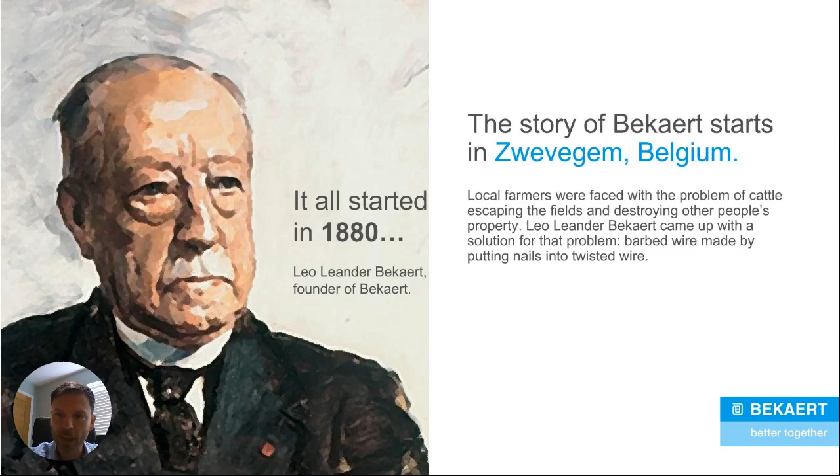Steel wire. We transform it, apply cutting-edge coating technologies, and specialize in continuously improving any property of steel wire products. Explore the world of Bekaert. From wire rod, we draw steel wires even as thin as 1 micron. We bundle them into cords or strands or ropes and can process them into an end product. We design and coat them to meet your specific requirements.

From specialty steel wires and cords for automotive component and tire makers, over solutions for agriculture or the construction industry, to leading technologies for the energy and extraction sectors, the numerous applications of Bekaert products are as unlimited as your imagination. We co-create with you. It's the core of our corporate philosophy, better together.

Whatever your need, wherever you are, Bekaert is present all over the globe. We're committed to assist you with our local support and services whenever you need them. We aim to be your preferred supplier by delivering superior value in everything we do. Before any Bekaert product reaches you, its quality is assured thanks to extensive testing. And that's how we've created a legacy that stretches over 130 years. Every day, we continue to build on this experience and increase our expertise in our world of wire.

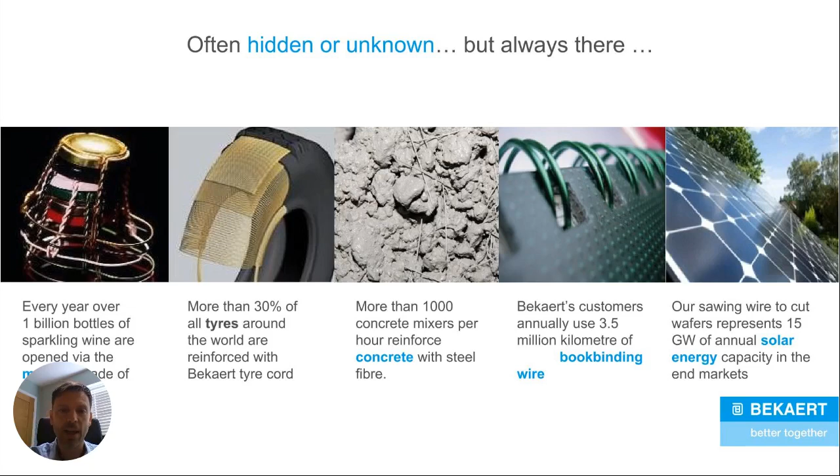It's not just building products that we make. If you can see these slides, champagne cork wire, for example, is a niche market of 5,000 tons per year. That's a lot of fizzy wine. Our largest industry is automotive, and the biggest product that we make there is reinforcing cord for rubber tires. We actually have a 25 to 30% market share of that worldwide, so we like to say that we've reinforced a tire on average on every single car in the world. Then there's Dramix steel fibers, but also other things like solar panels and even simple wires for book binding, that sort of thing.

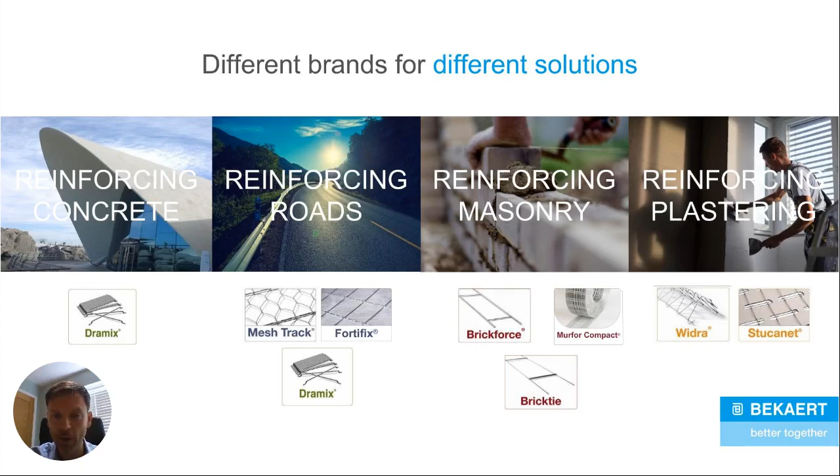These are our building products. On the left-hand side, you can see Dramix steel fibers. That's what today's talk is about. The other products that we have, other than reinforcing concrete, can reinforce asphalt roads, masonry, and plastering. If anybody is interested in seeing a webinar about those products, please let us know separately and we'll arrange that accordingly.

Some of the applications that we have for reinforcing concrete are as follows. Industrial floors is our day-to-day product. Tunnels and mining are usually our largest projects that we have.

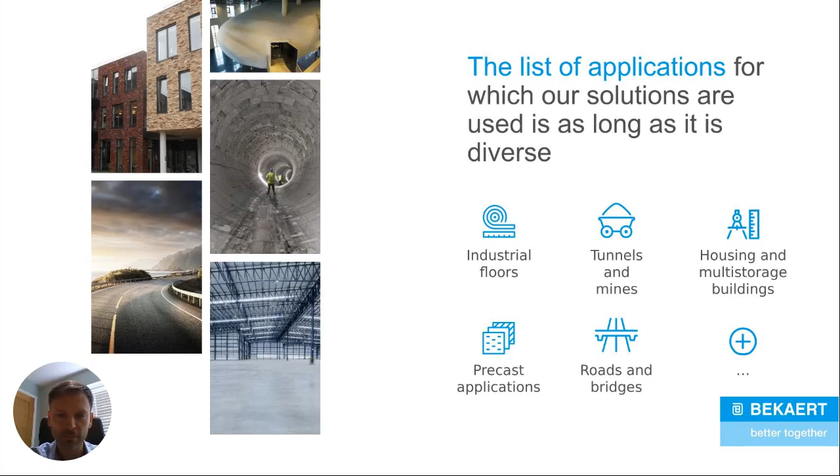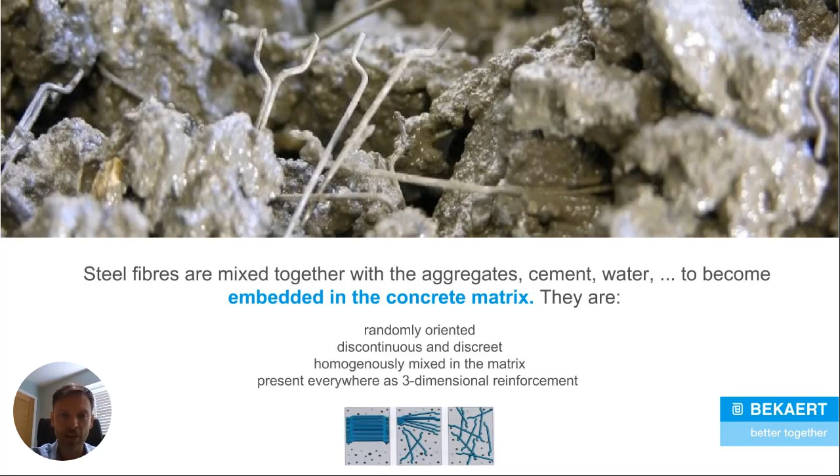The whole principle of steel fibre concrete is completely different to traditional reinforcement. Steel fibres are added to concrete to provide a ready reinforced concrete material, and the idea is that it is 3-dimensional. So there is no concrete cover. The fibres are mixed throughout the whole concrete mix, providing a matrix of steel wire, giving 3-dimensional reinforcement.

The idea of having 3-dimensional reinforcement is that when concrete exhibits an initial yield, there will be fibres inside that concrete mix, and the idea is that they will bridge a crack and transfer stresses from one side to the other. Depending on the fibre type or dosage, you usually count around 100,000 fibres per cubic metre, and sometimes more. The idea is that there will be such a network of reinforcement that when there is this initial yield, there will be reinforcement in the locality to do so.

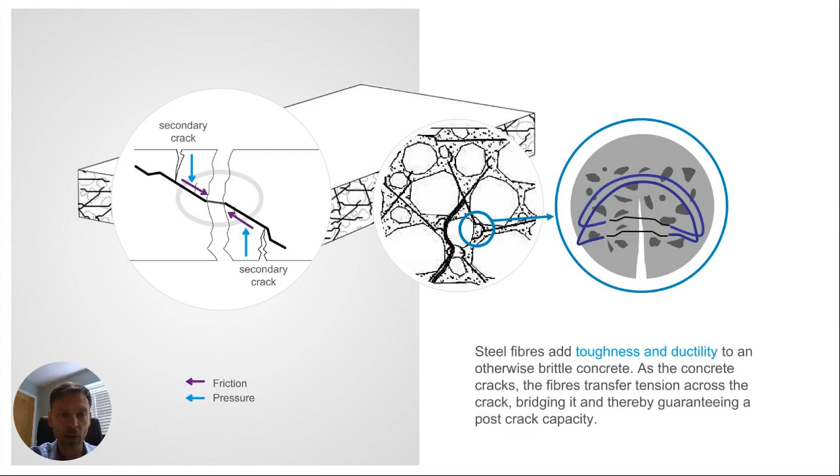Lots of different things are affected in concrete by the addition of steel fibres. The most important one really is increased toughness. This can also be called ductility or post-crack strength, and we'll be covering that in depth today. But also things like shear resistance, impact and fatigue resistance are all increased as well.

There are a number of different factors that affect how high or low performing a steel fibre is, and these are going to be covered in the next few slides.

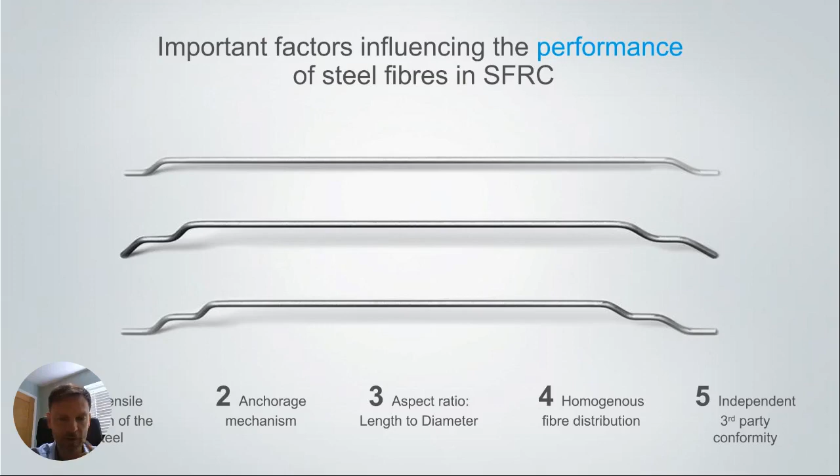The first one is the tensile strength of the wire. Most of our steel fibres use a tensile grade of wire of anything from 1100 to 2300 newtons per square millimetre, so at least twice that of traditional mesh. If these steel fibres with this shape were made from 500 newton grade wire, just like mesh or rebar, then they would fail in the concrete.

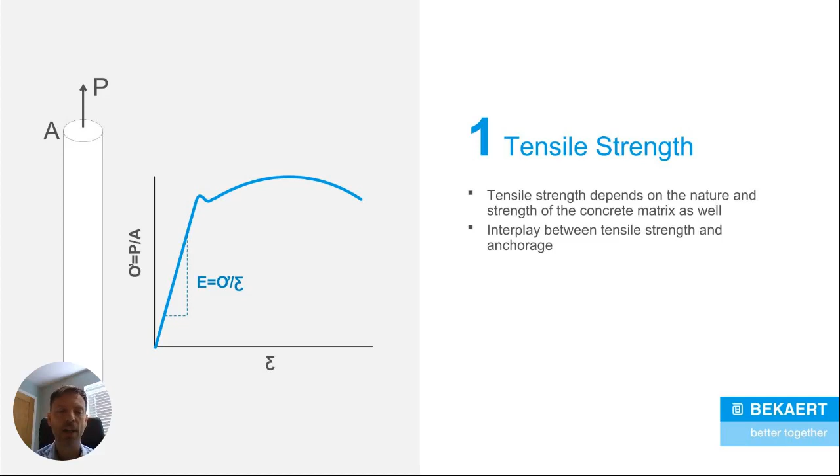The second important factor is the anchorage mechanism. This is effectively the shape of the fibre. If you could see these three fibres on the screen, Dramix 3D, 4D and 5D, they all have different shapes. The idea is that these shapes are called anchors and they lock into the concrete to provide concrete ductility.

This slide shows the 3 different fibre families that we have: Dramix 3D, 4D and 5D. A little bit of history - Dramix 3D is the original Dramix. We've been making that in Belgium and overseas since 1975. Until 2012, Dramix 3D was called simply Dramix because there was no other type. It is a straight wire fibre with hooked ends, a simple hook end.

What we can see here is the effect of having a single fibre embedded in concrete, 50%, and then pulled out of the concrete. With an individual 3D fibre it would take a force of around 300 newtons for that fibre to yield. The failure mode of that shaped fibre is that if you apply enough force, the fibre will pop out of the concrete. The anchor would deform, the fibre would become completely straight, then pop out of the concrete and stop providing ductility to your concrete.

Dramix 4D was developed after a 3-year research and development program between 2009 and 2012. You can see the failure mode is actually very similar to that of the 3D fibre, but you need a much higher force to start that elongation of the anchor - 500 newtons to see the fibre start to pull out of the concrete. So the 4D fibre has the same failure mechanism, but it takes a greater force for it to actually happen.

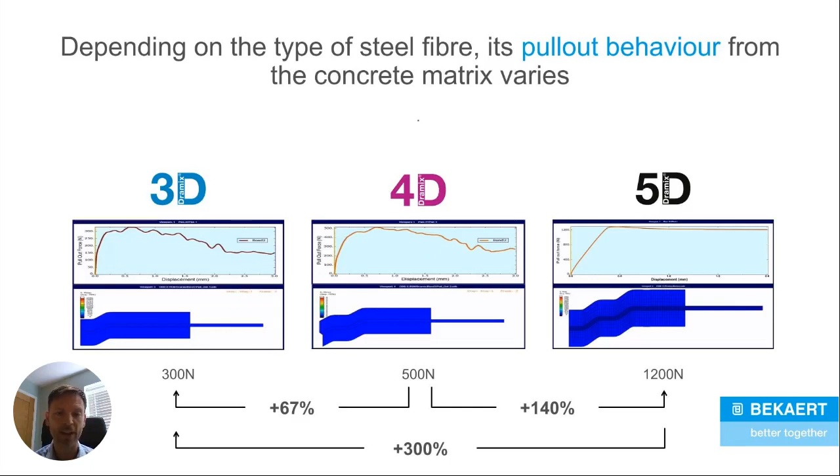What happens to the straight part of the wire is the yield will occur there, but in order to stop that fibre from snapping, we use an ultra high tensile grade of wire of 2,300 newtons. That wire has an elongation capacity, a certain percentage allowance to allow that fibre to stretch without breaking. So the failure mode of Dramix 5D is completely different, and that gives us different ductility values because of that.

The third thing is the aspect ratio. This is the length divided by the diameter of the fibre, which gives you a number. The higher that number, the more fibres you have in your concrete mix, so the denser the wire matrix inside your concrete.

For example, on the right-hand side we have 3 different Dramix fibres. They're all from the 3D family, so they all have a single hook on the end, but they have different aspect ratios and different lengths. One is 50, the other two are 60 millimeters, but drawn to different diameters. If we look at the 3D 4550 BL, that's a 50 millimeter long steel fibre with a diameter of 1.05, giving it an aspect ratio, rounded down, of 45.

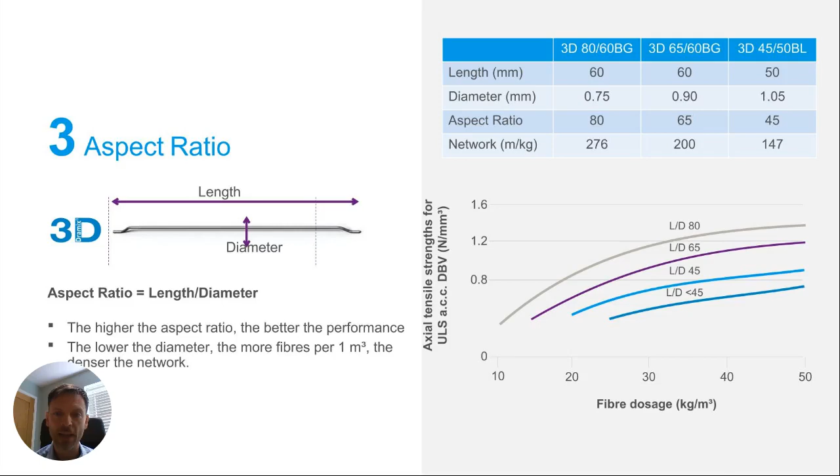If we have a 60 mil long fibre, drawn down to a 0.75 mil diameter, you actually get a lot more fibres per kilo, meaning a much denser network of steel inside your concrete. You can see the actual network of wire in a cubic meter of concrete, if you look at the last row on that table, is twice that of the 4550.

The fourth thing is homogeneous fibre distribution. On the photo in the center, we have two examples of fibre addition. On the right-hand side is a high aspect ratio fibre added to the concrete in loose format, and on the left-hand side is the same fibre glued together in bundles. One aspect of high aspect ratio fibres is that you get higher performance.

The downside is that workability is decreased and it becomes more difficult to work with that fibre. If you have that fibre in loose format, the fibres tend to conglomerate and you get what you could call a steel hedgehog being added to the concrete, which is very difficult to mix in and impossible to pump.

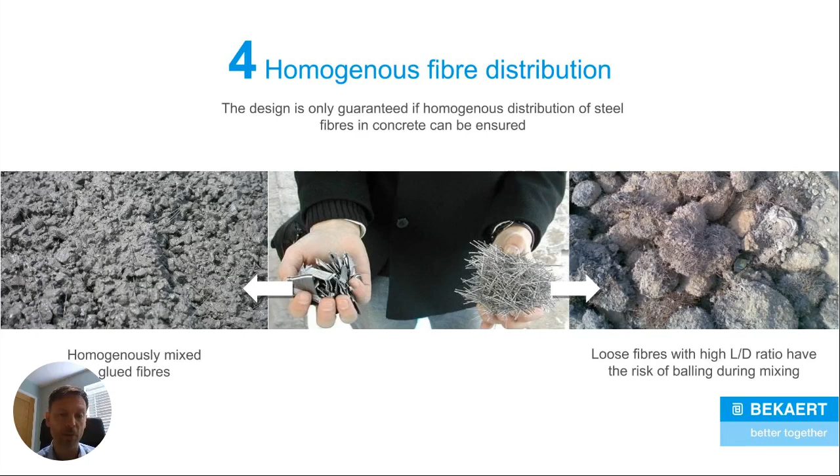The way we make the addition of these easier is to collate them into clips using a water-soluble glue. The fibres are added via a simple conveyor into the concrete. As soon as the fibres hit the mix, the water breaks down the water-soluble glue, and the fibres disperse in the concrete. So it's important to know that if you use a high-performing fibre, and they are glued, they will mix a lot better.

The fifth thing is third-party conformity. Every single pallet of fibres used in concrete in Europe, including the UK and Ireland, has to be accompanied with a CE label. This label gives some basic physical properties of the fibre and also some basic test data.

Now here's some basic principles of concrete behaviour when fibres are added. Starting on the left-hand side, plain concrete: if you have a sample loaded centrally, simply supported, at some point that concrete will crack because it has no ductility, and you'll get instant brittle failure of the sample.

If you add fibres to this concrete, SFRC, steel fibre reinforced concrete, you will not increase the first crack strength of that sample, but you will give it post-crack toughness. So the fibres will not increase the strength of the concrete until there is a yield, but then they will stop that sample from failing.

If you have fibre concrete with some traditional bar in there as well, what you get is effectively a bending hardening situation, which is something important to remember in a few slides' time.

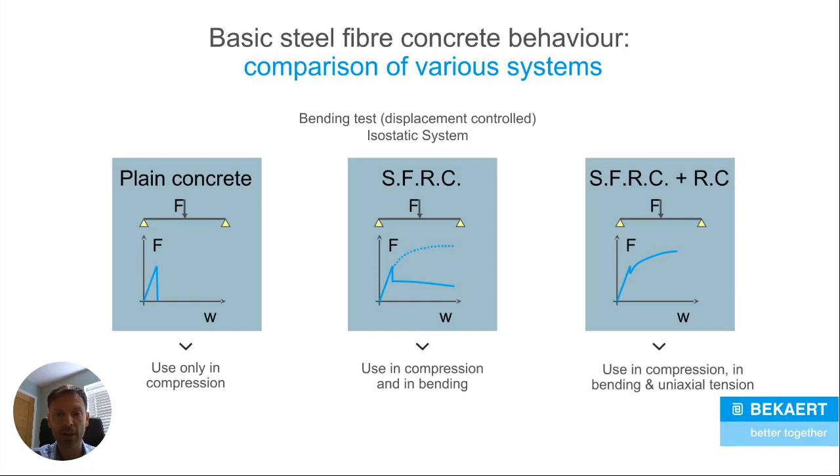Basic design principles: certainly when designing an industrial floor, for example, to the ultimate limit state, this means applying various factors to the materials and to the loads. What you get is a capacity of your actual as-built concrete far greater than the theoretical capacity, so it's important to know there is a lot of safety built into these designs.

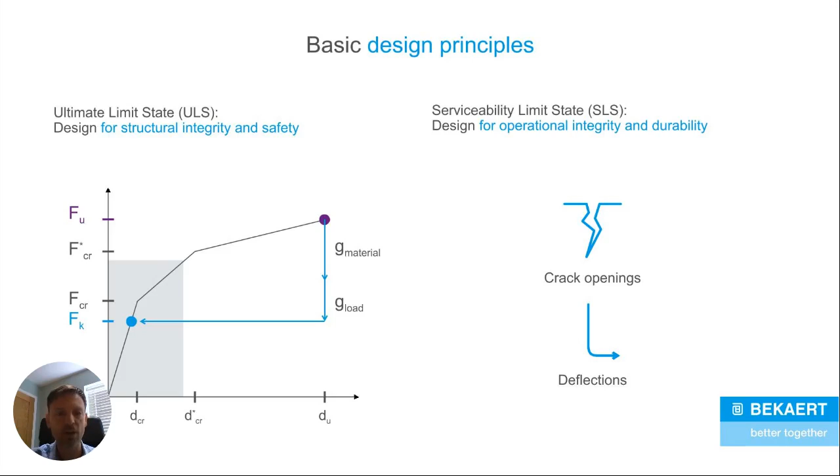We also run serviceability limit state checks, which don't take into account any of the loadings or anything. They're more to do with the deflection, shrinkage, and crack openings of the concrete.

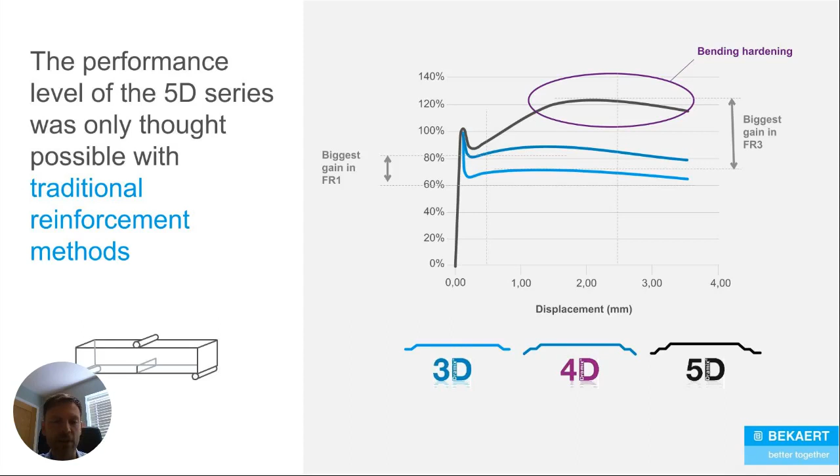Dramix 5D, on the other hand, works differently. Again, the same principle remains. The first crack strength is not increased, but what you will get after that first crack is an increase in the capacity of the concrete. So what we're getting is bending hardening - this is the ability of the concrete to be stronger after it's cracked.

You can see some real life examples of the 3 different fibres that are tested to the EN beam test. If you have any more questions about these, please ask at the end in the comments section and we'll try and answer them.

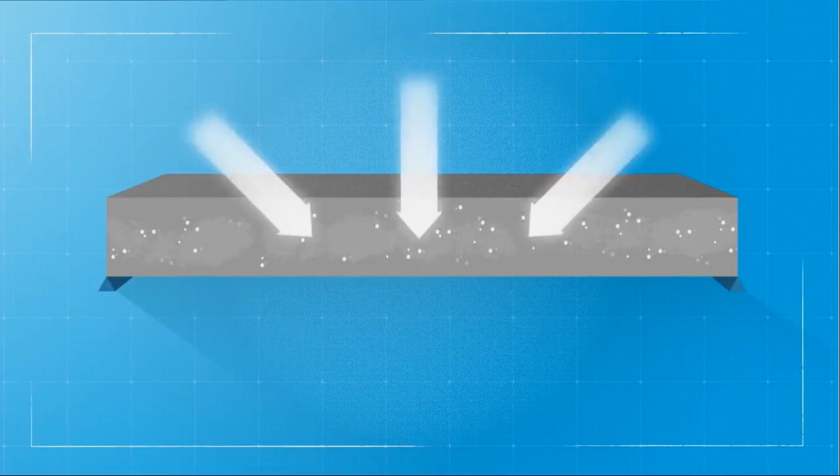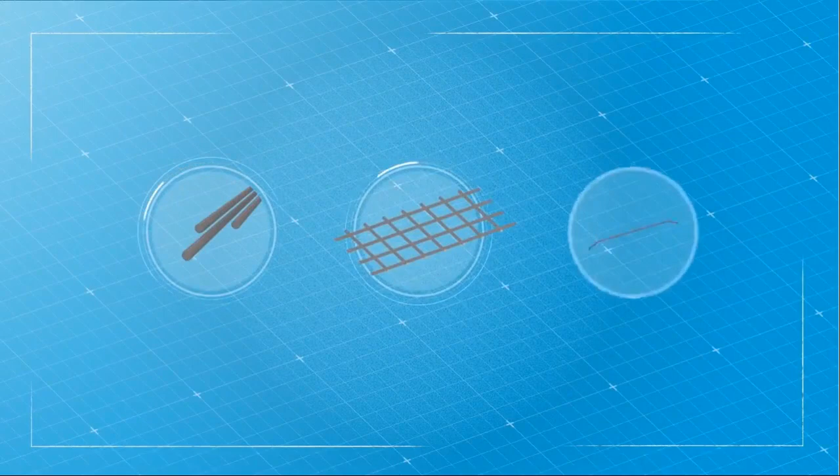Concrete is naturally brittle. Typical stresses like impact, fatigue, and loading lead to cracking and eventual failure. Adding reinforcement to the concrete helps to absorb these stresses and to limit the formation of cracks, increasing the load-bearing capacity and ductility of the concrete structure. There are several ways of reinforcing concrete. We've all heard about rebar and steel mesh, but did you know steel fiber is just as strong and reliable?

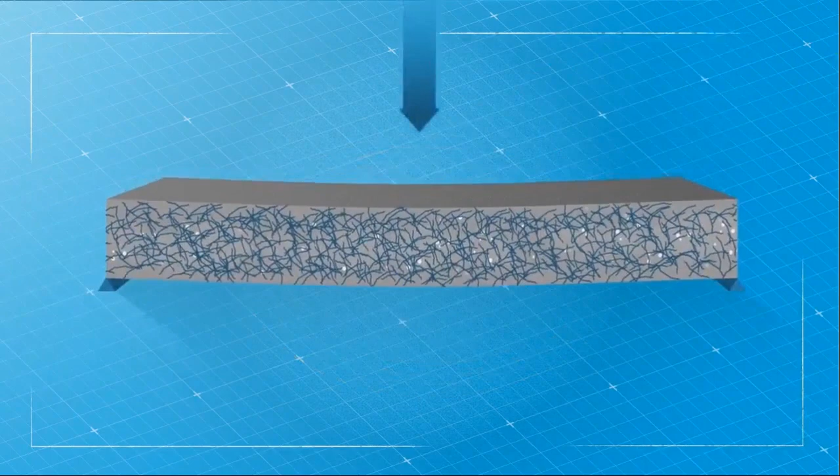Since its introduction over 40 years ago, steel fiber reinforcement has proven its merits in the most demanding structures and applications. The core difference between steel fiber and other reinforcement solutions is that fibers are part of the concrete matrix, turning it into a composite material. Instead of providing strength in distinct locations, steel fibers form a reinforcing network throughout the entire concrete structure, increasing its overall ductility. So how does this translate into concrete behavior?

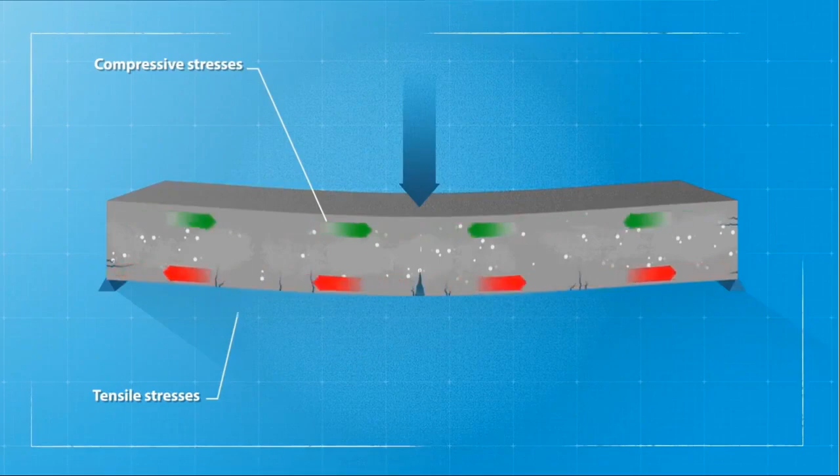Take a random concrete structure. When subjected to loading, compressive and tension stresses start to build. Over time, small cracks will appear in places where the stress reaches a critical point. Steel fiber interacts within the concrete matrix, absorbing tensile stresses at any point and in any direction. As a result, steel fiber picks up small cracks much faster than traditional reinforcement.

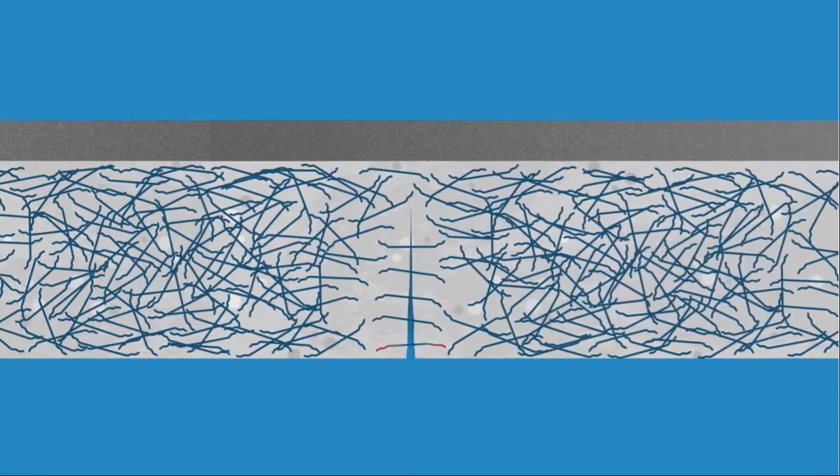When a crack occurs, the hooked ends of the fibers remain solidly anchored on each side of the crack, acting as a stress transfer media. Once the maximum bond strength with the concrete is reached, the pull-out takes full effect. This enables the next fiber to take over, delaying cracks from growing.

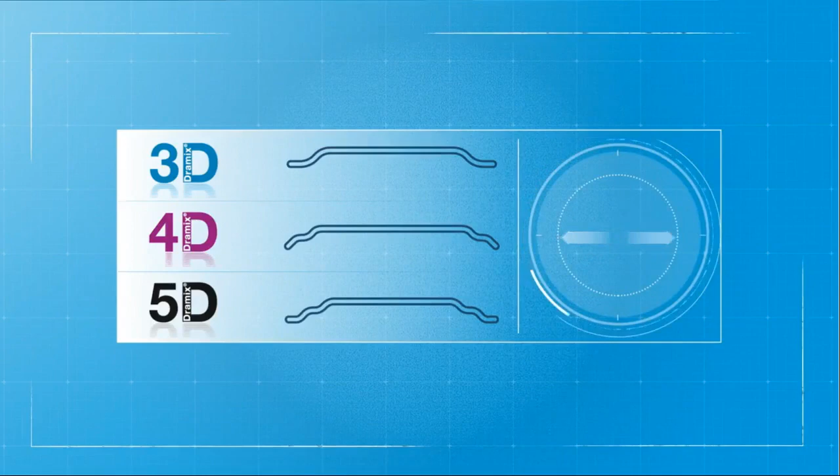Different loads require different steel fibers. To meet any design requirement, Bekaert offers 3 steel fiber types: Dramix 3D, 4D, and 5D. Each fiber has a different hook, strength, and ductility. Consequently, they also behave slightly differently when dealing with stresses. Let's take a closer look.

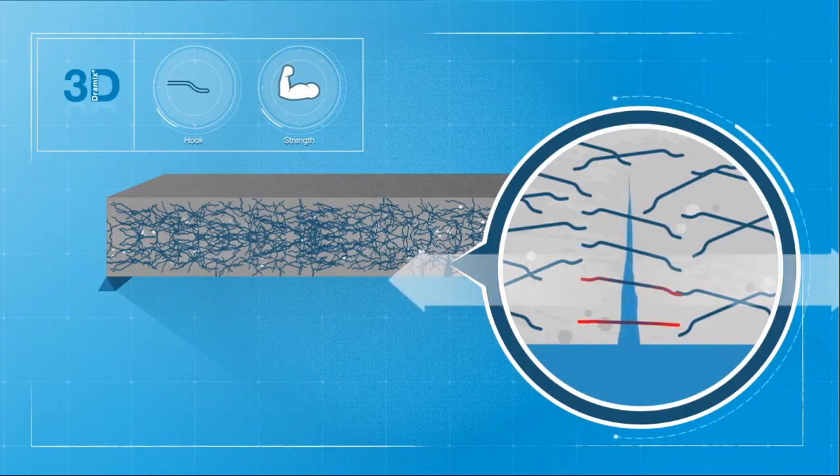First up is Dramix 3D. When a small crack occurs, the 3D hooks firmly anchor inside the concrete matrix. As the stress increases, the hook slowly deforms. As soon as the fiber loses its bond with the concrete, the pull-out takes full effect.

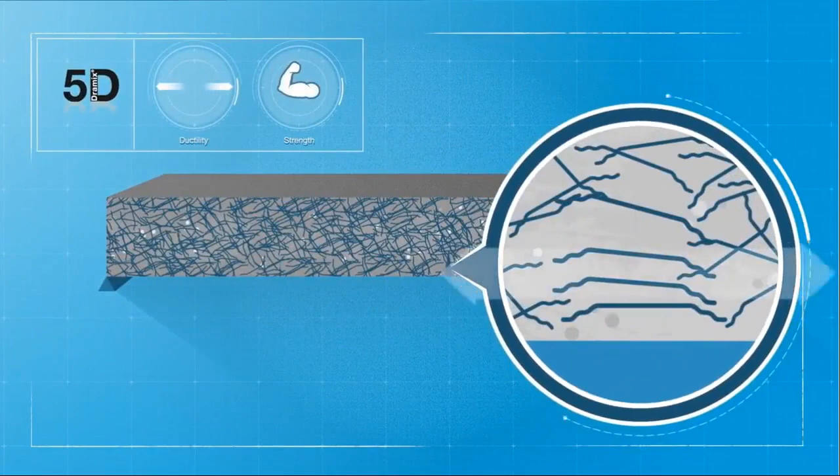Dramix 4D provides the same process, but with even better anchorage and a significantly higher tensile strength of 1,650 Newtons per square millimeter or more. Dramix 5D behaves differently altogether. Here, the hooks never pull out from the concrete. As the stress increases, the wire slowly elongates until it reaches its maximum strength.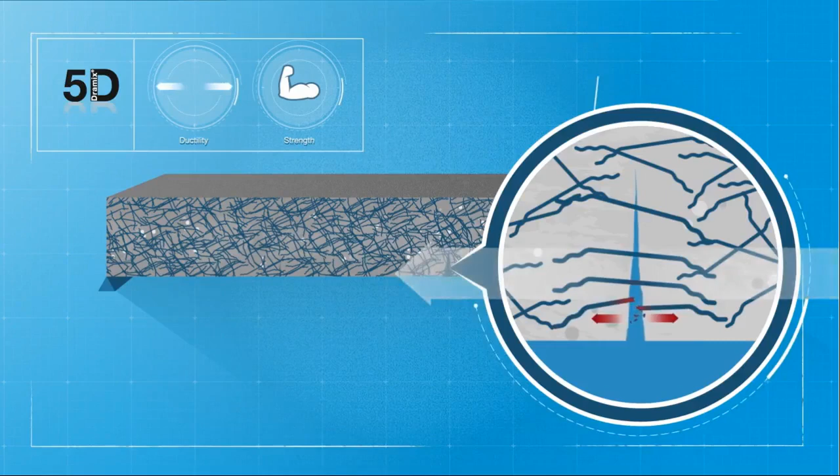With a tensile strength of 2,300 Newtons per square millimeter and elongation of 6%, concrete structures reinforced with 5D can take high flexural stresses over a long period. Based on these behaviors, we can conclude that Dramix steel fibers effectively increase the load-bearing capacity of concrete.

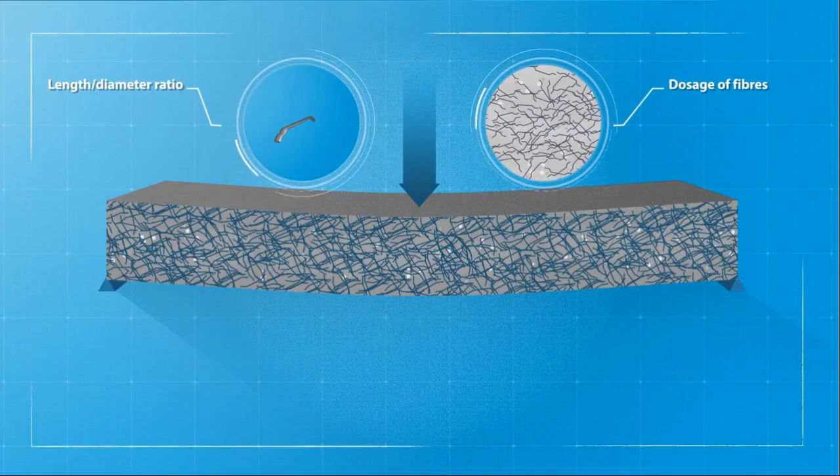It can be used in almost any concrete structure with or without additional reinforcement, where the ductility of your concrete structure depends on the length-diameter ratio of the fibers and the number of fibers used per cubic meter. It is essential that enough fibers overlap to create a continuous network in the concrete mix.

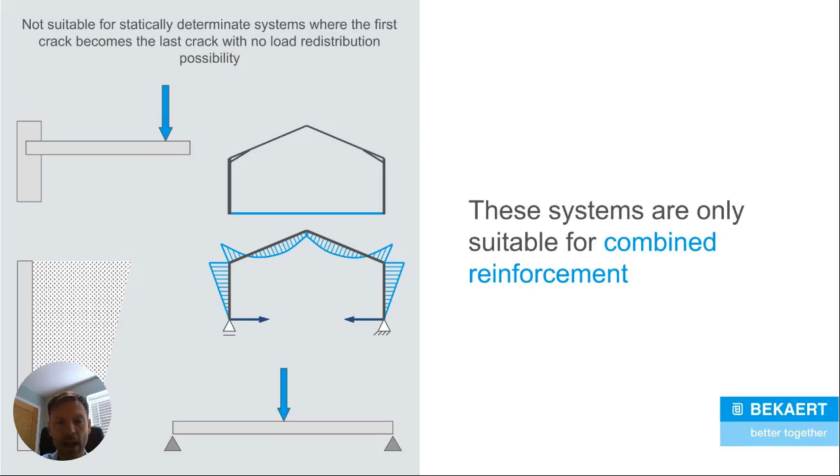It's important to note that steel fiber concrete is suitable for some applications and not others. It's not suitable for statically determinate systems. For example, you can see that balcony on the left-hand side. You've got to remember the principle that the first crack is always the last crack in a statically determinate system. So you would need to use a combination of steel fibers and traditional reinforcement to reinforce any of these types of structures.

So the applications we have, this presentation will largely be tailored to suit industrial floors, but the principles remain the same for any application. It's important to know that.

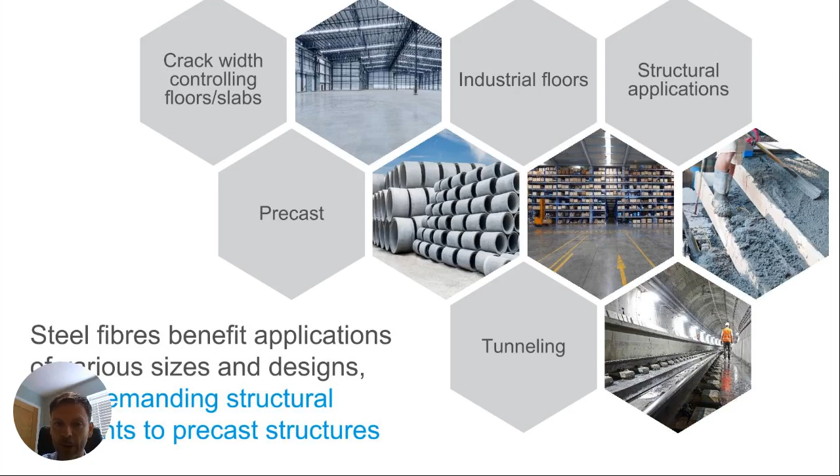Here's a few examples of those applications. You can see industrial floors are quite prevalent on a few of these. On the top in the center, you can see something called a clad rack structure, which will get mentioned a little bit in this presentation. A lot of you might not have heard of these, but they're quite new and quite in vogue with a lot of blue chip clients around the world now. It's the way of having an extremely dense network of pallets inside a building.

If you can imagine a standard portal frame warehouse, the way that that is constructed is the floor goes in last after you've got the steel structure up and the cladding on and the building weather tight. A clad rack structure is the other way around, in that the floor is also the foundation for the entire structure. And actually the structure is the racking system with some cladding and roofing stuck to the top and the sides. So it's done in a completely different way.

Clad rack structures usually need a steel fiber reinforced floor of at least 400 millimeters deep to take the huge loads. But as well as the downward forces from the very heavy racking systems, you also have uplift in certain places from the wind hitting the side of the building. So this is a very good application for steel fiber concrete.

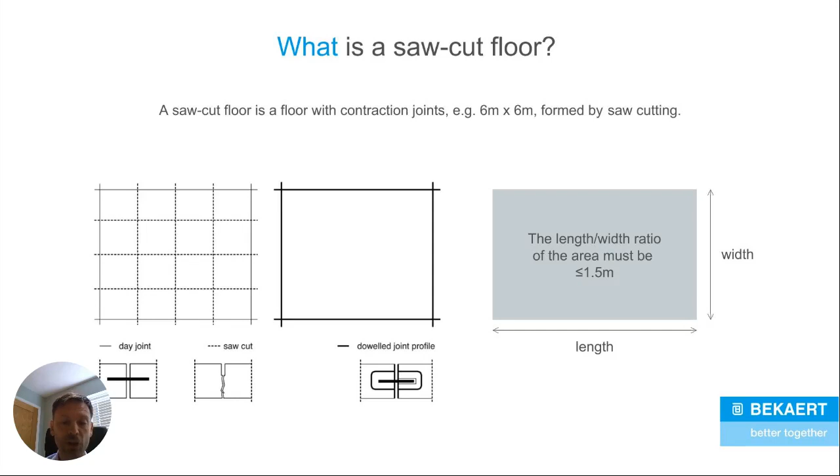A saw cut is made using a saw that's drawn through the concrete to a third of the slab depth. The idea is that it will induce a crack beneath it and allow the concrete to move.

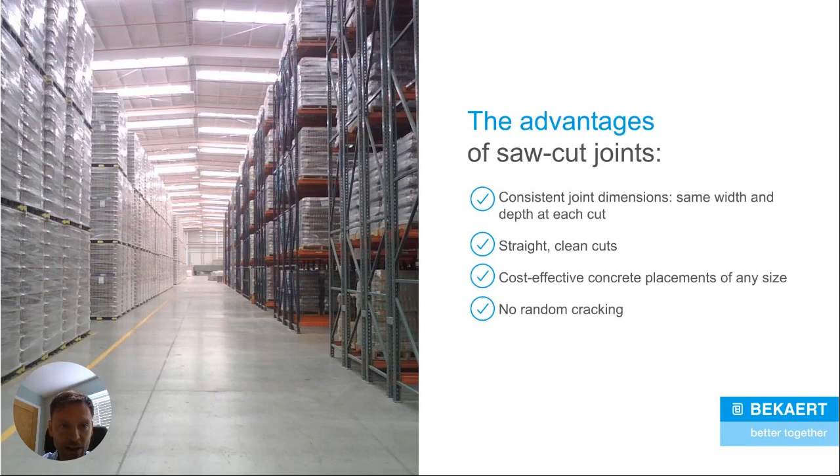Why would you use a saw cut floor? In some applications they can be the cheapest way to reinforce a floor, usually with a quite modest amount of reinforcement. Concrete will shrink, so you need to relieve those stresses by inducing joints. The advantages are you can hopefully minimize unplanned cracks, which clients don't like due to aesthetics, and usually it's the cheapest solution, but not always.

The next evolution of floors, made possible by lots of research and development of steel fiber performance, is jointless floors. The name is a little strange, since it isn't necessarily a floor with no joints, but large daily panels of concrete cast without saw cuts. So effectively, a jointless floor is a saw-cut-free floor.

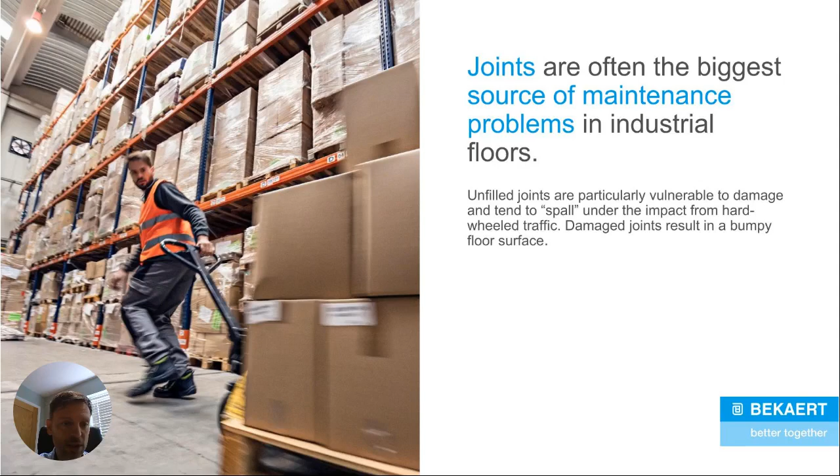Jointless floors are popular with certain clients because the more joints a client has, the more long-term maintenance issues they're likely to face. Forklift trucks driving over saw cuts can cause a lot of damage that will need repairing at some point. Quite often these logistics facilities are 24/7 operations that never really close down, and getting a repair contractor in there can be very difficult because clients need constant access to the whole building.

Here's an example of problems you can get with cracked floors or floors with saw cut joints. On the left hand side is a picture of a crack that has actually been repaired. But concrete will largely keep shrinking over weeks and months, maybe up to 2 years, and while it's shrinking you get more crack openings. So if you repair a crack early but the concrete continues to shrink, that repair may also fail. If you can minimize the number of cracks in your slab, that's another long-term maintenance issue reduced for the client.

Curling can occur in any concrete because you have a wet material that goes hard, but the water is still inside, and it has to evaporate out of the top surface over time. This can create curling. Rocking slabs occur where a joint opens up too wide and you lose aggregate interlock from one side to the other. So with rocking slabs, when MHE drives over that joint, you get physical vertical movement at the joint, which definitely needs repair. We've also got spalling joints and poor load transfer, similar to rocking slabs. These are all big problems for owners of buildings with concrete floor slabs.

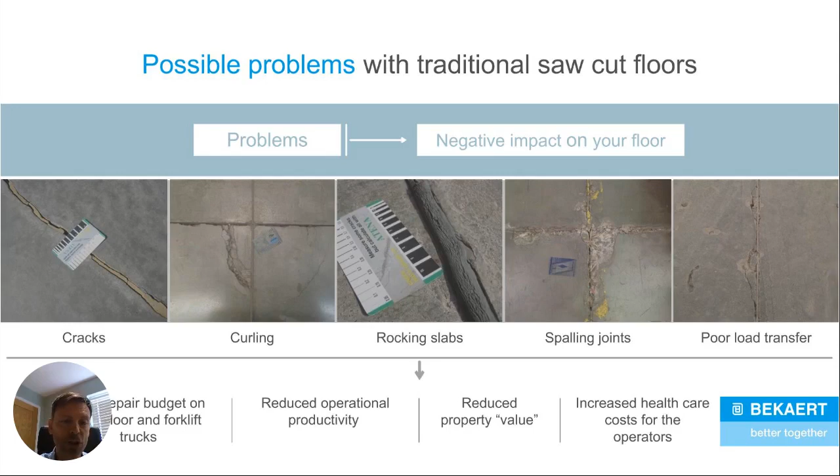So a way around this would be to reduce or completely eliminate saw-cut joints in floors. This is what jointless floors do.

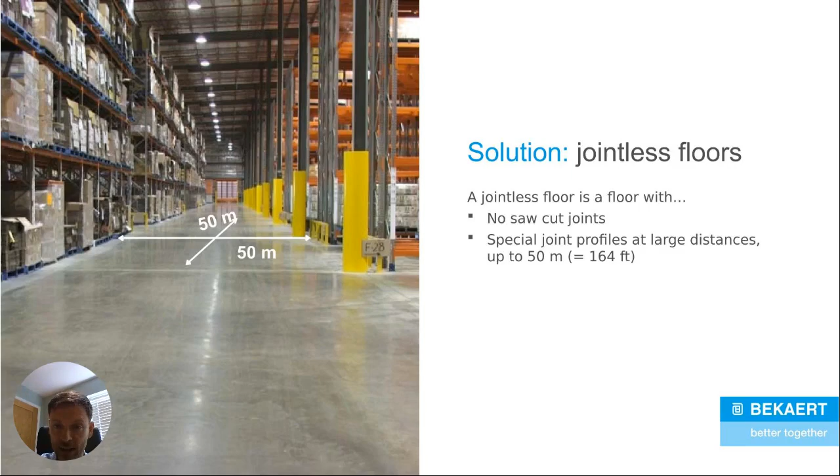A jointless floor, in theory, can be up to 50 meters by 50 meters in a single day with no intermediate stress relieving joints. That's 2,500 square meters. Often what dictates how large a jointless panel can be is the daily concrete supply the contractor can actually get, but that is theoretically the maximum with no saw-cut joints.

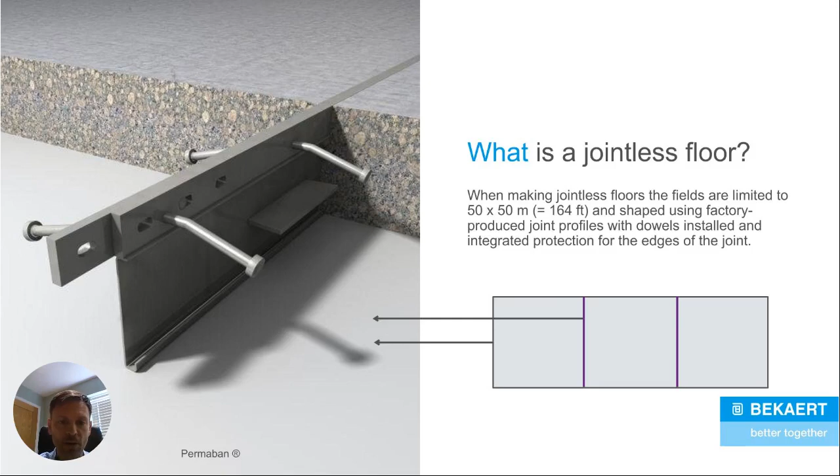The way you do this is by having a dowel joint profile, such as Alpha Joint made by Permaban. This is a leave-in-place permanent metal formwork joint, so it isn't like a timber shutter that you have to strike and remove the following day - it stays in place for the life of the floor. You can see it doesn't have traditional dowels; it has a trapezoidal plate dowel that gives load transfer from one side to the other, and also two steel plates at the very surface of the floor that reinforce what would ordinarily be a bare joint concrete arris. This gives protection for when mechanical handling equipment drives over it.

The next evolution above jointless floors is a seamless floor. A jointless floor has no saw-cut joints, but a seamless floor is a true floor without any joints at all. Obviously some buildings are too big to cast in a single day, but joints between daily panels can be tied traditionally so there will be no joint openings in the building whatsoever.

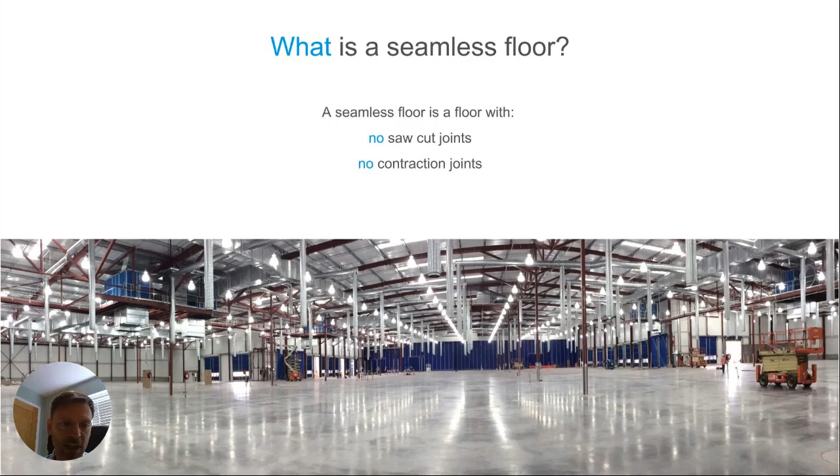Reducing or eliminating saw-cuts is a big long-term maintenance positive for a client, but having a floor with no joints whatsoever gives the client a lot of future flexibility. It means they can put their racking systems, shelving units, or mezzanine floors pretty much anywhere, whereas with lots of joints, the positioning of this equipment can often be compromised.

It's important to know a seamless floor cannot currently be done with steel fibres alone. You need a combined solution - what we call a combi slab - of traditional mesh and steel fibres, either a single or double layer of mesh.

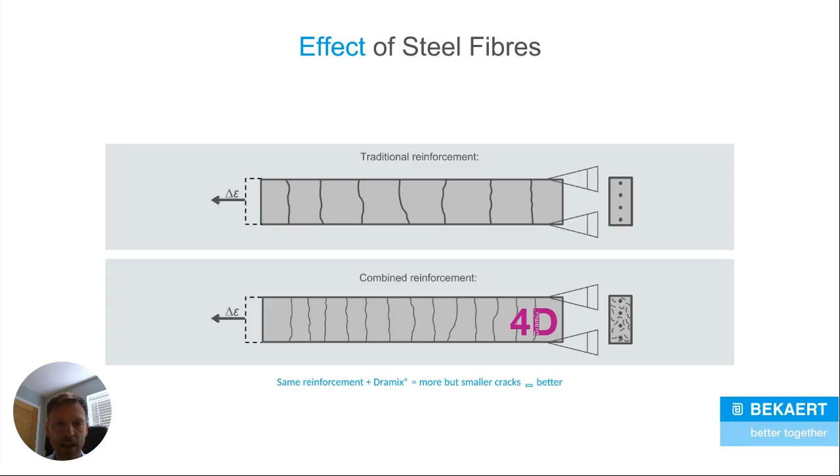The basic principle of adding fibres to traditional reinforcement is as follows. This is a diagram showing a restrained piece of concrete. With traditional reinforcement, you will get cracks. With a combination of reinforcement, you will still get cracks - in fact, you'll get more cracks, but the crack openings will be narrower, so there will be thinner cracks. That's the basic principle of adding the two types of reinforcement.

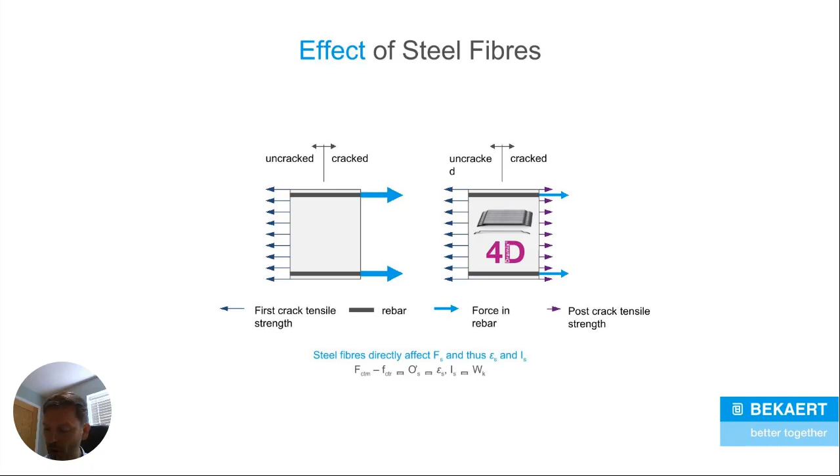At some point, the concrete will crack, and in order to get a calculated crack width in your concrete, it's dependent on the stresses in the steel. The addition of fibers to that concrete mix decreases the stresses in the rebar, allowing a reduction of the rebar needed to get a defined crack width calculation.

An important thing to note when designing an industrial floor to a crack width is that the higher the effective height of the concrete - the thicker the slab due to loads designed in the ultimate limit state - the more difficult it is to get that defined crack width calculation. So thinner slabs in general need less reinforcement, be it steel and rebar, than a thicker section, in order to achieve the required crack width a client needs. Very important to know.

Here's an example of a job in Holland. We had the basements of a multi-story building that needed to be designed for uplift due to water pressure from beneath. Traditionally this slab needed to be 400 mil deep, with European meshes with bars at 100 mil centers, top and bottom - no fibers at all.

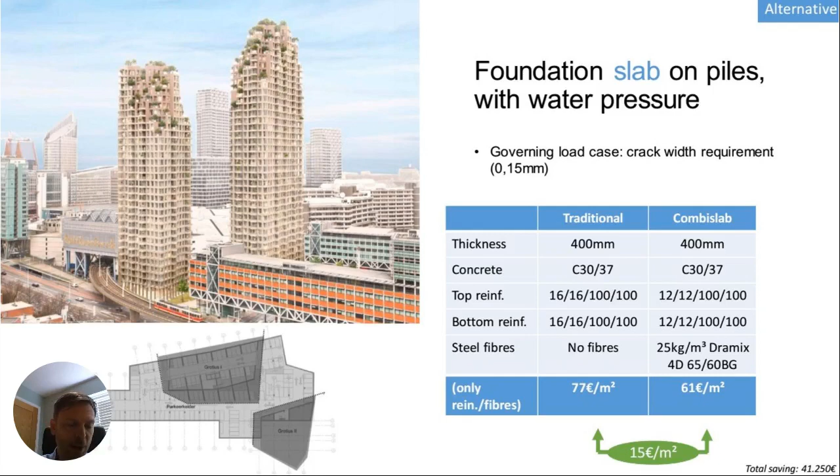Our alternative solution was a combi slab - it still had traditional reinforcement in there, but with the same slab depth, same concrete grade, lighter meshes, and 25 kilos per cubic meter of Dramix 4D. What you got from this was still the required 0.15 mil nominal crack width that the solution needed, but the cost differential was 15 to 16 euros per square meter cheaper by reducing the amount of rebar and adding steel fibers.

So why would you have a seamless floor? You have a lot of high-speed lift trucks in a building like this, so the less joints they drive over, the less long-term maintenance you will get. Lots of durability - you have the strength of both types of reinforcement in there. You have quality, no doubt about it. Cracks may occur, but they will be designed accordingly. And as I mentioned earlier, you get full flexibility for the client. If you have less joints or no joints, machinery and everything can go pretty much anywhere in the building.

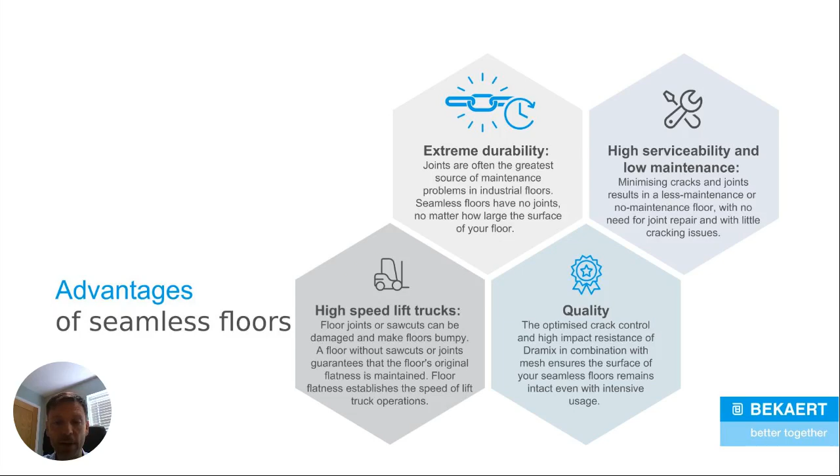Typical applications for a seamless floor: distribution centers, clad rack warehouses, as I've already explained. The biggest application we have in the UK is for scrapyards and waste transfer systems. Clients like this system because it makes sure they don't have these joints. When you have a scrapyard and a loading shovel, the abrasion resistance needed on the concrete is very high, and the joint damage you'll get is also very, very high.

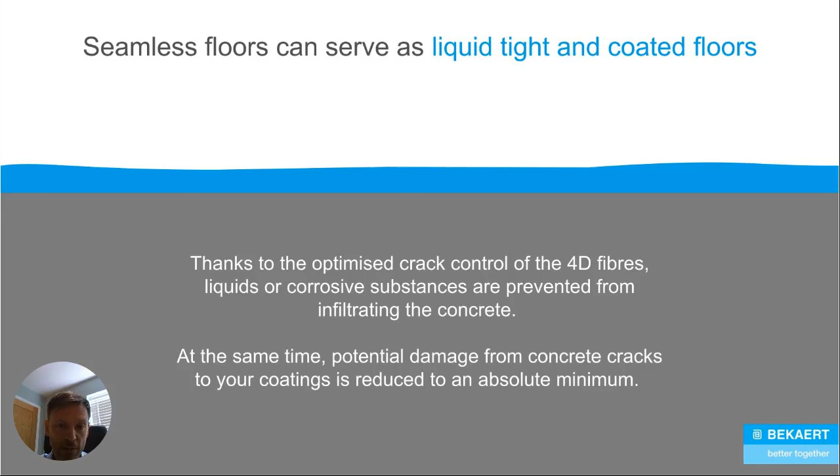Now, with a defined crack width, we can actually design concrete elements to retain liquid - liquid tight floors.

Different applications that we have: the food industry, chemical industry, petrochemical. If you can imagine having a bund, for example, at an airport, the last thing the client wants, if they get an oil spillage, is for that oil to penetrate into the ground beneath. An application like that would need to be designed to a defined crack width.

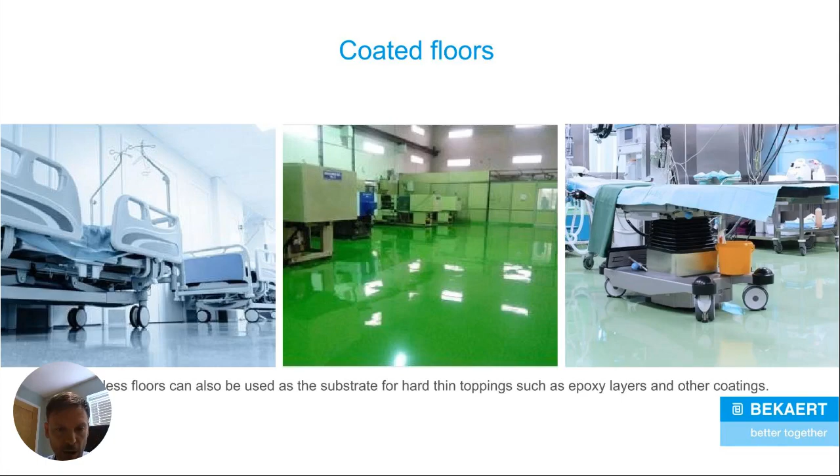Also, floors with coatings. What's important to note here is if you were to put something like a polyurethane screed or a thin resin on top of the concrete, quite often these materials cost more than the actual concrete beneath. But if your concrete slab cracks, then that resin will also crack - it's called reflective cracking. So quite often with these applications, the concrete slab beneath needs to be designed to a defined crack width.

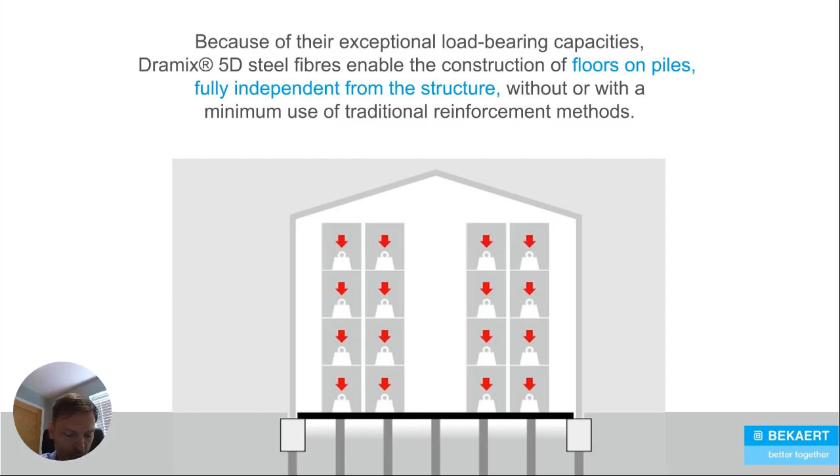And there we go - floors suspended on piles. This is a huge application in the UK, largely because we have a lot of coastline and therefore a lot of poor ground. Now, what do we mean by a floor suspended on piles? Well, we see this as a true structure. Admittedly it's a ground floor structure, but still we can't take any enhancement from the ground beneath. So it's a floor that is suspended from pile to pile that quite often has to take quite heavy loads. And you can see there.

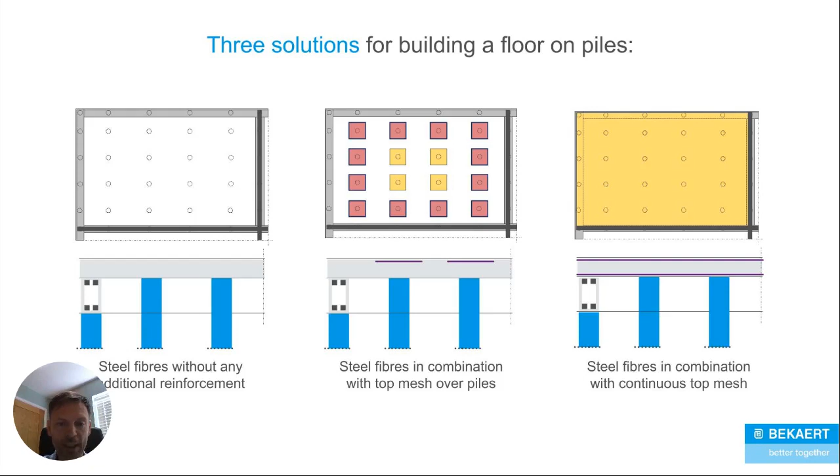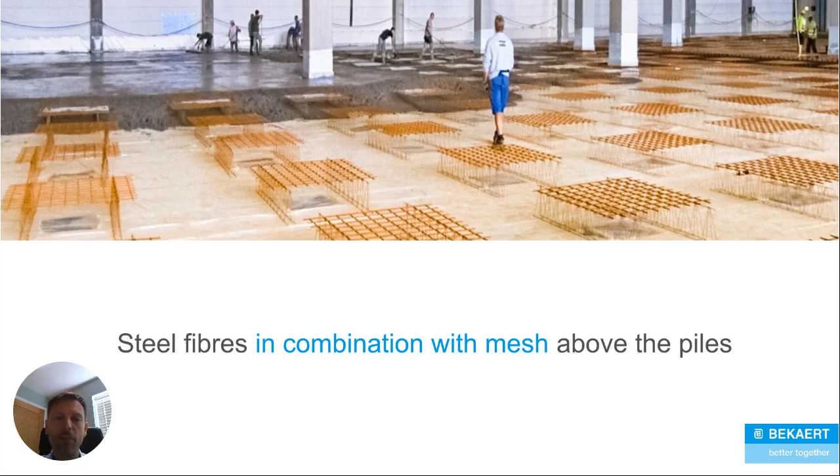The next evolution of solutions is to get rid of all the traditional steel completely and just have a purely fibre-only solution. So there's the Dutch system with localized mesh over the piles - you can see much less congestion of steel makes the system much quicker. This is the system we've had for a couple of decades: traditional mesh throughout, however reduced by anything from 40 to 60% over what it would need to be if it was fully traditionally reinforced. So you can see that's fibre reinforced concrete being pumped to the workface over the mesh.

As I've already mentioned, steel fibres can be used in floors on piles, and it is a prevalent application in the UK, where a lot of subcontractors much prefer to use steel fibre concrete nowadays because of the savings in time and money.

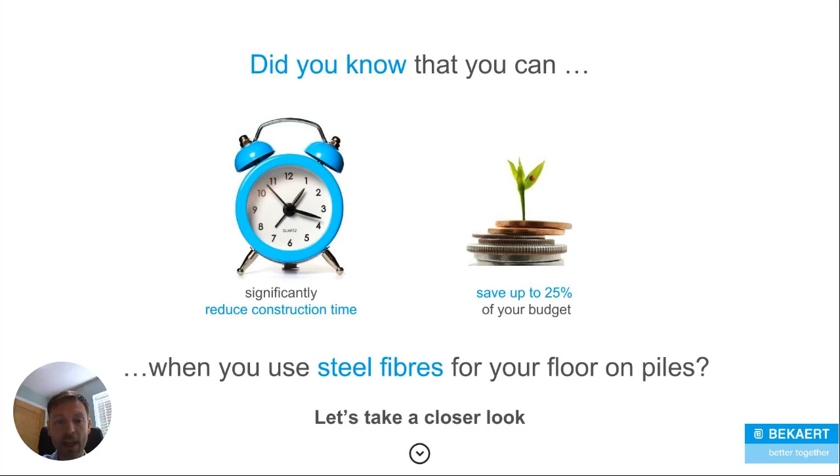This is a worked example, but a real example. This floor on the left-hand side needed to be 300 millimeters thick, designed for a UDL of 40 kilonewtons a square meter with top and bottom reinforcement. If you have that sort of solution, you need to fix the steel before you can do anything, which usually takes a few days, and then the amount you can actually pump per day is quite modest.

The three solutions that we have, as I've already discussed, are as follows. We'll start on the right-hand side again: combined reinforcement, so Dramix 4D and a continuous top layer, not two layers, just in the top. That would need to be 240 millimeters thick, and we're looking at a pour area substantially larger than the traditional scheme. The next one would be the Dutch style system with Dramix 5D and localized mesh.

That again could be thinner than the traditional scheme, designed to the same code and standard, but with substantially less traditional reinforcement. Therefore the daily panel size could be larger - bigger panels means less days on site. And then, due to the power of Dramix 5D and its bending hardening capabilities, the third solution on the left-hand side would be fibre only, same thickness as traditional, but with vastly greater daily panel sizes - that's over 1,600 square meters.

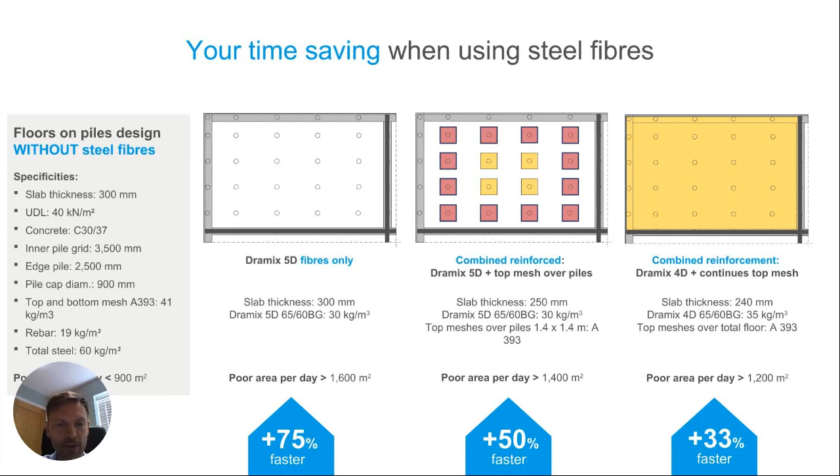Again, you might be limited by the amount of concrete you can get from the local batching plant, but the principle remains: 1,600 to 2,500 square meters per day is certainly possible with fibre-only solutions.

Now here's another project that we can look at. The less days on site, the less joints, the less panels, the more savings. So we have an example here, a 120 by 120 meter floor, that's about 14,000 square meters.

If it's traditional, what you would need is joint centers of, say, 30 meters maximum, and that really would be the maximum - quite often it's much less than that. So that would require 16 days on site just to pour. That's not forgetting all of the steel fixing that needs to be done beforehand. And that 14,000 square meter floor would need around 720 linear meters of joints.

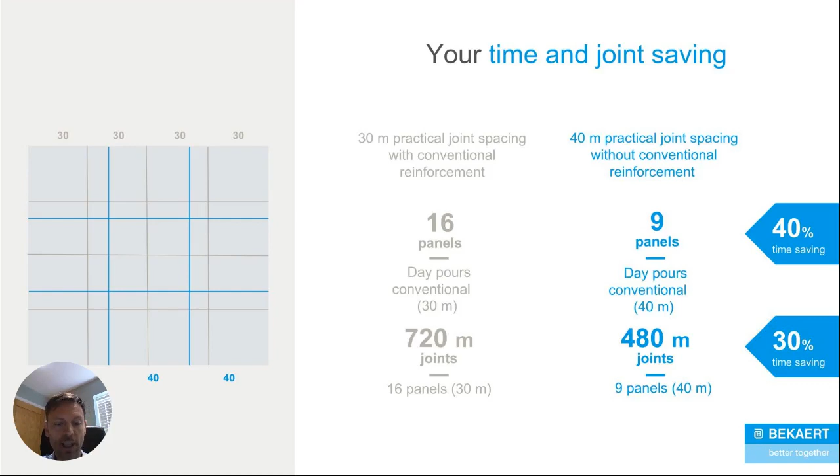To use a steel fiber solution, you'd have less days on site, larger panels, less joints, less long-term maintenance issues, and an overall cost saving for the project.

The conclusion is that we can design any pile floor, depending on the parameters, with any of those three solutions. So the main reasons for choosing these solutions over each other: if you went for the combined solution of Dramix 4D and a full layer of mesh, the main reason would be that you could design that to a defined crack width, which is an advantage of using the combined solution.

If you were to use Dramix 5D and the top mesh squares developed in Holland, this can be the most cost efficient, particularly if you use small precast piles or if the pile spans are large. Important to know that. But if the pile spans are fairly moderate, say under 4 meter centers, and particularly if you have piles with pile caps or enlarged flared heads, a fiber-only solution, because it's the fastest, can often be the cheapest as well.

So it's important to look at every single project on its own merits. Those solutions can give different advantages, both in performance and cost saving, over each other, depending on loadings, pile type used, pile span, and client requirements on crack width.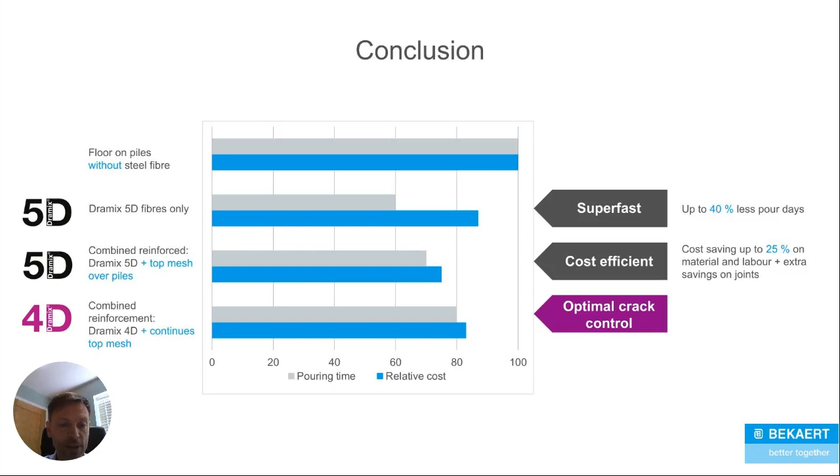There are some limitations on these fiber floors suspended on piles. You're looking at a maximum grid size of 6 meters - most economical will be between 3 and 4 meters. The joint distance you're limited to 50 meters, but think about it - if you had a 2,500 square meter panel and it was 300 deep, you would need 750 cubic meters of concrete, which is a tough ask from many ready-mix suppliers in the country. So quite often we are dictated by the actual local supply.

Here we see a diagram of a floor of around 11,000 square meters, so 120 by 95. You can see that the daily panels are split up by a leave-in-place joint. That one you see there is called signature, which is similar to the alpha joint I explained earlier. We have panel sizes of around 40 by 40, so call it 1,600 square meters per day. That 11,000 square meter floor will be poured in 6 days.

Extremely economical. Don't forget, no steel setup beforehand if it's 5D only, meaning the amount of preparation before you actually pour is minimal. The next solution on top of that would be to use Dramix 4D and traditional reinforcement.

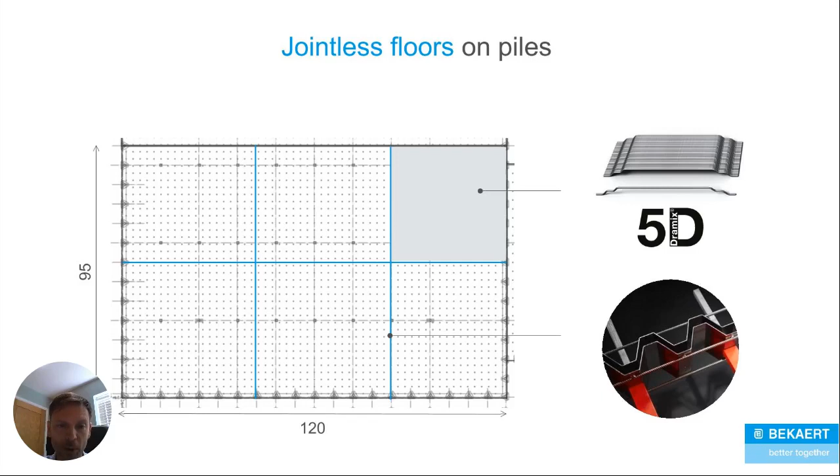It's important to note that you're not limited to 50 meter long panels, and you're not limited by aspect ratios of your panels. They don't need to be square. They can be long, thin, and in theory you could even go up to that full 120 meter length in a single day if you could get enough concrete.

Applications for floors on piles are just the same as ground bearing ones really: distribution centers, factories, cold stores, warehouses.

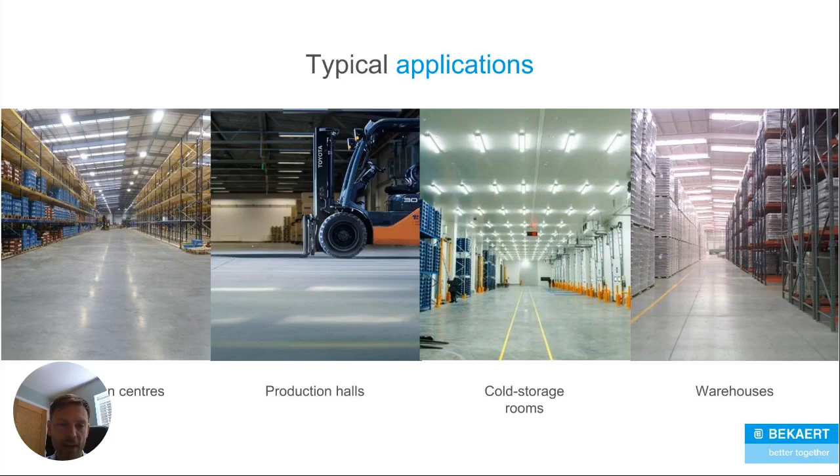They can be added to concrete and aid against early age plastic shrinkage cracking, and sometimes they can replace air entrainment agents. So they have a couple of advantages you cannot get with traditional steel or steel fibers. But after the first 24 hours after concrete has been cast, those fibers stop doing their work. They don't add long-term ductility to the concrete, and they don't replace steel - it's important to note. What's also important is that they can be used in combination with steel mesh or steel fibers, because they do a different job.

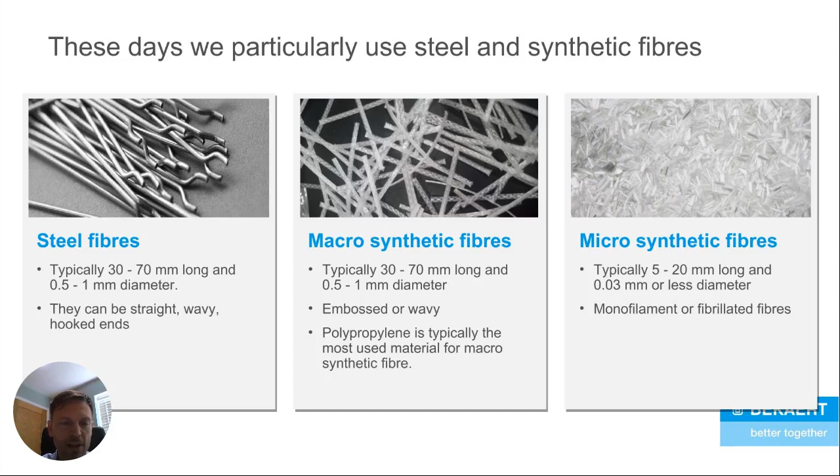The other type of plastic fiber on the market are macrosynthetic fibers, which are effectively plastic fibers that try to copy the shape and size of steel fibers. Let's look at a bit of the analysis of the different materials these are made from. It's important to note the Young's modulus of steel in comparison to that of plastic - the Young's modulus of synthetic fibers is actually less than that of the concrete they're trying to reinforce. And the melting point of the plastic fibers is very, very low.

As a summary, we can see what different fibers can actually do inside concrete. Microsynthetic fibers can do something that steel cannot: aid against early age plastic shrinkage cracking. Very important on external concrete - if you're laying external concrete that doesn't have polypropylene fibers in there, you may get unwanted early age plastic shrinkage cracking.

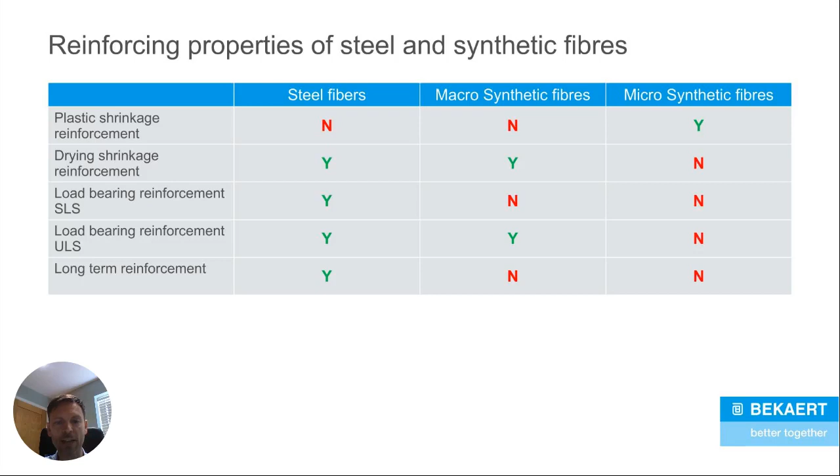But after that, they don't add any strength to the concrete. So you can use steel fibers to reinforce your concrete due to the loads, or because of your serviceability limit state design, but polypropylene fibers cannot do the same. Macrosynthetic fibers could be used in the ultimate limit state design, but they will add substantially less ductility than steel fiber reinforcement.

One thing we get asked quite a lot is how do you ensure the homogeneity of steel fiber concrete, because we're adding the reinforcement to the concrete mix. After a large investment in research and development, something we've created is called the eyeD solution. I'm going to share the final video of this presentation now, just to give you an idea of what it can do.

Again, a slight delay, but it will work.

You don't take chances on the safety and integrity of your concrete structures. Checking the quality of your concrete reinforcement is therefore an important step in the building process. To perform a thorough and accurate total quality control and to exclude all human error, Bekaert developed Dramix eyeD.

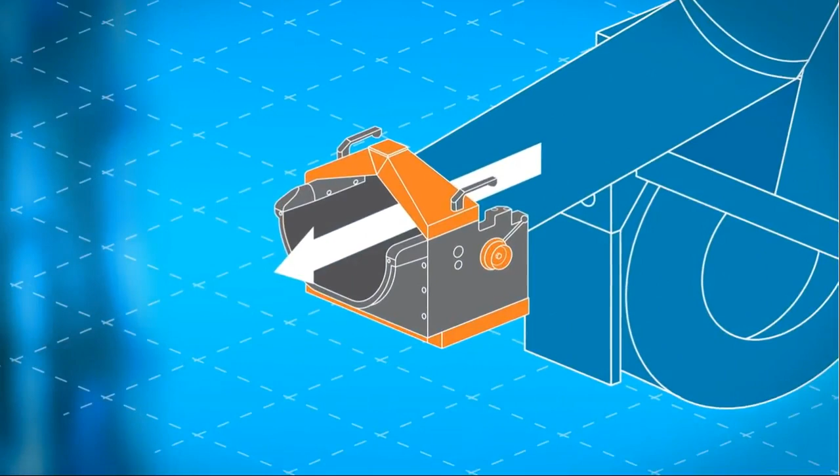Dramix eyeD is a measuring device that connects to the chute of concrete trucks. It analyzes the homogeneity and distribution of steel fiber reinforcement in concrete mixes. The data is measured at the chute and can be monitored in real time on your tablet or smartphone via Wi-Fi.

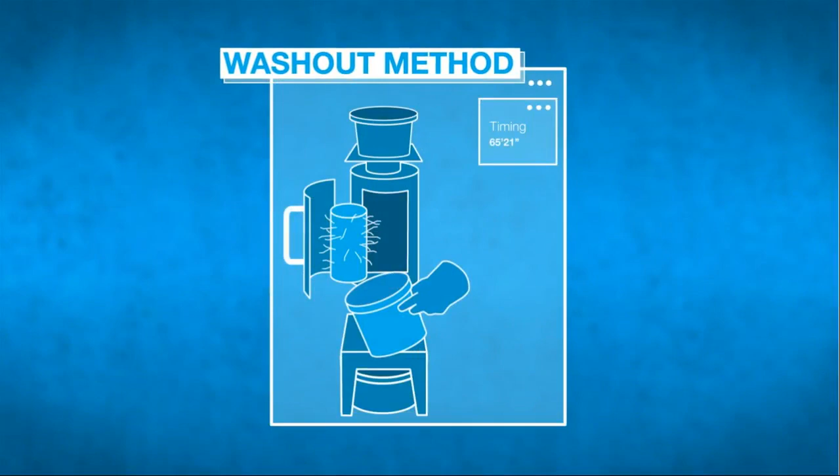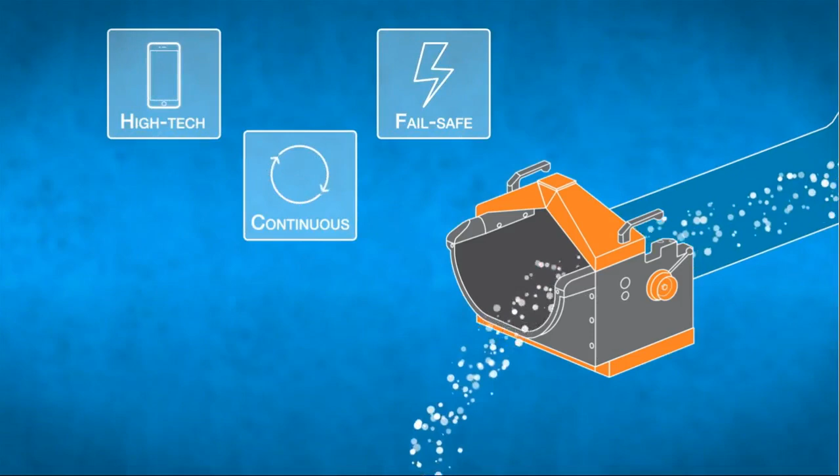Traditional quality control methods like washouts are known for being considerably labor-intensive and time-consuming. The automated system is simpler to use and provides a more accurate analysis of the distribution of steel fiber reinforcement in your concrete mix. The device continuously analyzes the concrete as it goes through the chute, allowing you to intervene immediately in case of inconsistency.

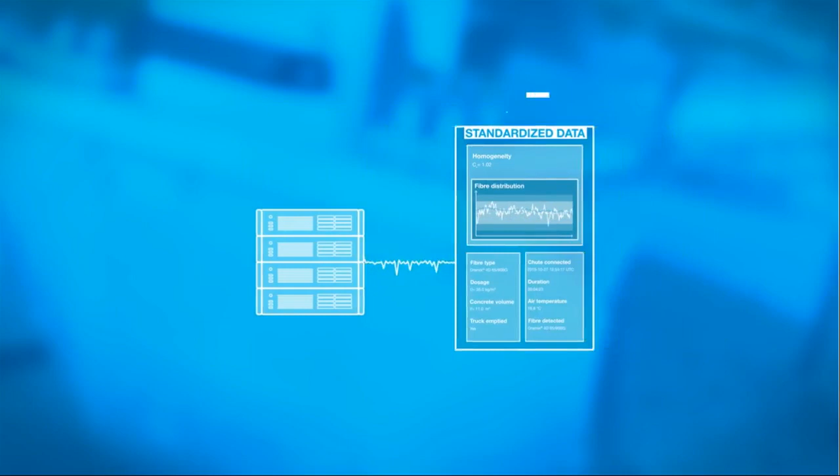You can instantly monitor the data generated by the Dramix ID on a mobile device via Wi-Fi. The data is also transmitted to a central server, where it is translated into clear, standardized graphs which are bundled into a report. You can consult this report from any internet-connected device and download the report from the central server as proof of the reinforcement's compliance with the norms.

Dramix ID gives you peace of mind when it comes to the quality of your industrial concrete structures. Don't take any chances. Take control. Trust in Dramix ID. Visit our website at www.bekaert.com/Dramix-ID.

I was a little bit keen there, I think. I cut off the tail end of that presentation.

Okay, we're coming to the end now. One thing that I want to talk to you about is the benefit of working with ourselves, because we can actually give design guidance to you by using our software tools.

Important to remember is that for every single country, there are different guidelines and codes that can be used. So our actual tools that we've developed encompass any of the local standards and codes. For example, in the UK at the moment, Concrete Society Technical Report 34 seems to be the guideline that most people use, but overseas it wouldn't be. So we have options to design for all of these.

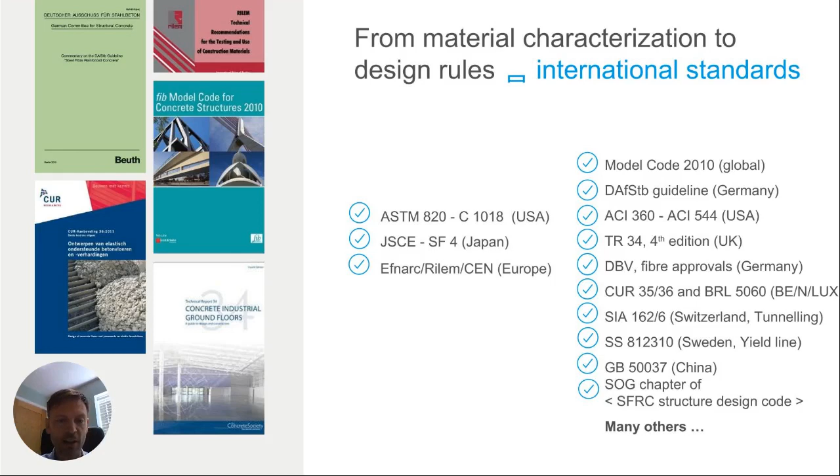And by using that, it actually uses a database that incorporates all Dramix performance related information in there. So you can design any concrete elements using traditional reinforcement, steel fibre reinforcement, or a combination of the two. And thousands of European engineers have this now, including in this country.

You, as external engineers, now have access to these tools if you so wish, with the caveat that we come and we train you for a few hours just to show you what to do. They're all Excel based, all very simple to use. Anybody who's interested in getting access to these, by all means, get in touch with us separately. We can talk about that.